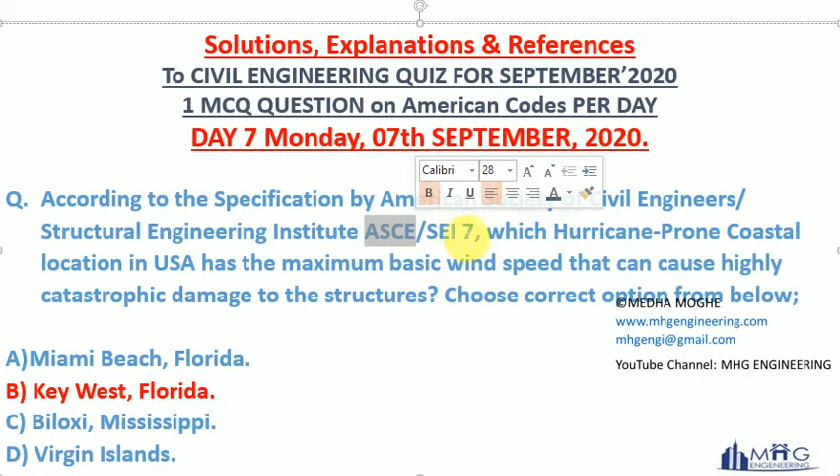And the 4 options were: A, Miami Beach, Florida; B, Key West, Florida; C, Biloxi, Mississippi; and D, Virgin Islands. And the correct answer is Key West, Florida. Key West, Florida gets the maximum basic wind speed as per American code ASCE. ASCE 7 is the American loading code.

Explanation: day 7 correct answer is B, Key West. Refer to the specification for minimum design loads and associated criteria for buildings and other structures, that is ASCE 7. 2016 is the latest version. I have attached the cover page of that. This is the cover page for ASCE 7-16, and I have also attached table C

26.5-3 for basic wind speeds at selected coastal locations in hurricane prone areas. It is on page 736 of this ASCE code, and these basic wind speed values are given in miles per hour. If you look closely at it, Key West, Florida gets the maximum basic wind speed. It is almost as high as 200 miles per hour. So this is the solution or proof for that answer.

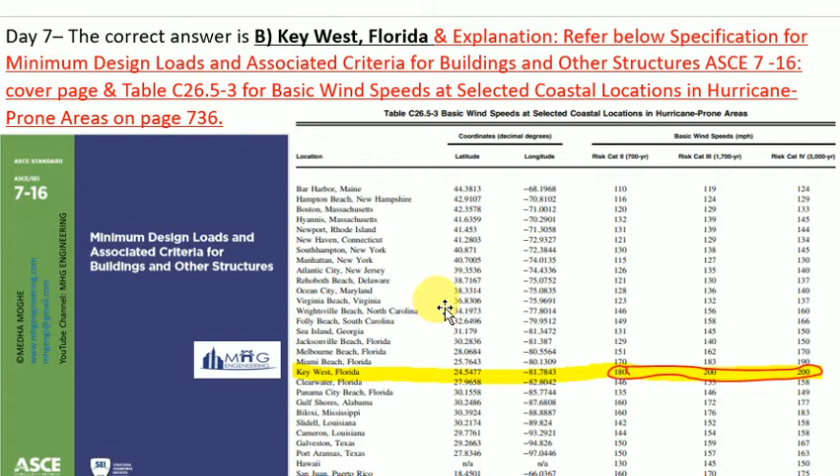Going to the next question, that is day 8, Tuesday 8 September 2020. The question was: according to Wind Loads and Anchor Bolt Design for Petrochemical Facilities, a special publication prepared by the Task Committee of the Energy Division of the American Society of Civil Engineers, ASCE, which of the following options is false for pipe racks? Pipe racks are the open structures which carry pipes in the process industry.

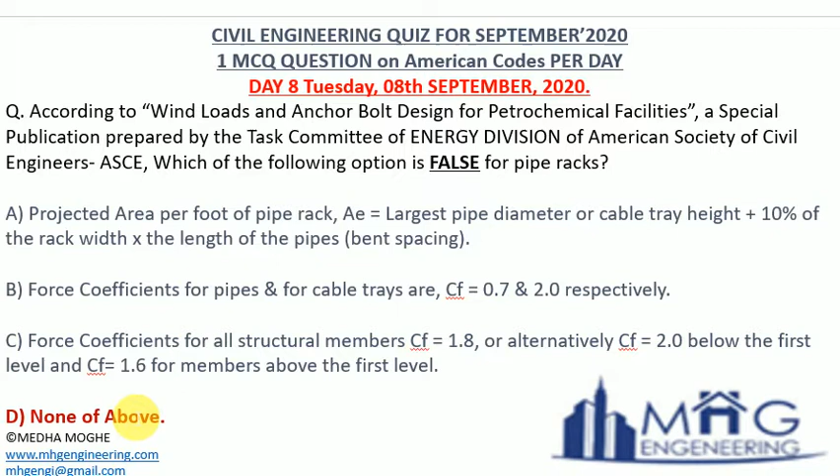And truly speaking, if you open this ASCE publication, Wind Loads and Anchor Bolt Design for Petrochemical Facilities, all these A, B, C are valid or true for pipe racks. They are not false. So D, none of the above, is the right answer. A, B, C are valid for any pipe rack wind load.

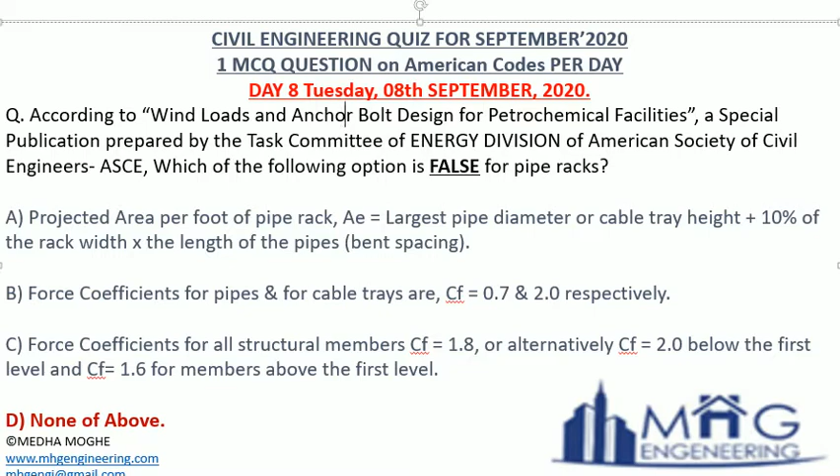Many engineers across the globe asked me to give the solutions for these quizzes, so instead of writing solutions to each one of them, I thought of making a solution video so everyone can see it. So day 8, the correct answer is D, none of the above, as options A, B, C are all valid for the pipe rack. And for the explanation, refer to the cover page below.

This is the cover page of the ASCE publication, Wind Loads and Anchor Bolt Design for Petrochemical Facilities. ASCE is the American Society of Civil Engineers. ASCE code is the loading code. They have this special publication. And apart from the cover page, I have also attached pages 4-2 and 4-3 for specifications for the wind loads published by the task committee of ASCE.

On page 4-2, it talks about the pipe rack, clause 4.1, and it says that for a pipe rack, CF, the force coefficient, is equal to 2.0 below the first level, 1.6 above the first level, and for all structural members it is generally 1.8. So option C of the above question is given in clause 4.1. Just next to it there is clause 4.1.1. It talks about the tributary area of piping, which covers option A of this question.

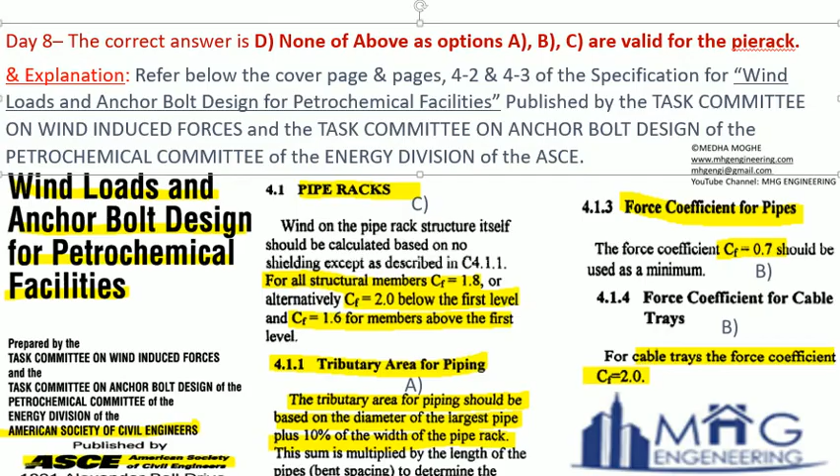Next, the day 9 question was on Wednesday 9 September. The question was, as per the latest American Concrete Code, that is ACI 318-2019, the slenderness effect can be neglected for columns not braced against sidesway if the following slenderness ratio of the member, K Lu upon r, is satisfied; choose the correct alternative. Four alternatives were given. If the columns are not braced against sidesway, the slenderness effect can be neglected if the slenderness ratio is less than or equal to 22. Option A is correct, and the reference for that is given on the next page.

For day 9, the correct option is A, less than or equal to 22. For explanation and reference, I have given the cover page of ACI 318-19. ACI 318-19 is the Concrete Code of America. ACI is the American Concrete Institute. 2019 is the latest version, and you will find information about slenderness on page 68 of the code, clause 6.2.5.1(a), which says that for columns not braced against sidesway, the slenderness ratio K Lu upon r should be less than or equal to 22. So option A is the correct answer.

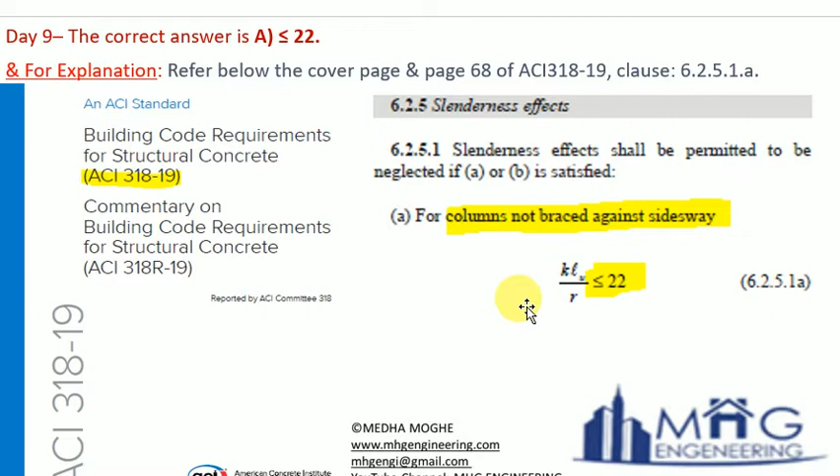Many got this correct. Those who are working on the American code will know the slenderness ratio. The basic aim of this quiz series: in October I had a quiz series on Eurocode, and in September on the American code. Basically, to increase awareness amongst civil engineers and students about world codes, I have floated this quiz.

The question on Thursday 10th September referred to the STAAD design parameters in the American Steel Code: Bmax, the maximum allowable width of flange, default value used in the design of tapered sections. So basically, what should be the maximum flange width for a tapered section in the American Steel Code as given in the STAAD parameters. STAAD.Pro V8i is the software used for design of structures, mostly in industrial plants. It is used worldwide, and for Bmax, the maximum width of flange default value, I had given four options, and option B, 83.333 feet, is the correct answer, with reference and explanation on the next page. This is day 10.

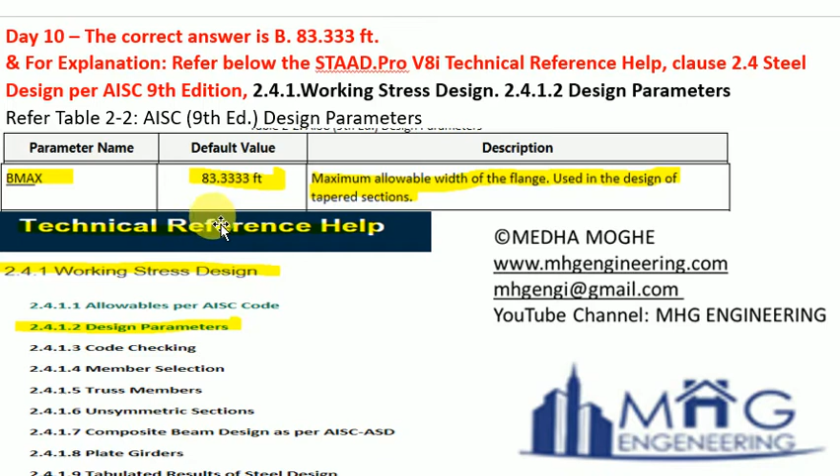Okay, so this is the reference or explanation for the correct answer. Many had asked me to attach this so they can have a look at it. If they have STAAD.Pro, they can just click, go in the technical reference and find this answer.

Going to the next day, that is Friday 11 September question, and the question was with reference to the STAAD design parameter in American Steel Code, DIA, the default value of diameter of shear connectors is as follows. Choose the correct alternative, and the four alternatives were given, and the correct alternative is D, 0.625 inches.

Now American Steel Code is AISC, American Institute of Steel Construction, AISC 360 they call it, and in American codes the foot pound system is also used, not always MKS or SI system. So there will be pounds, feet and inches in their codes. So D, 0.625 inch is the correct answer for default value of diameter of shear connectors.

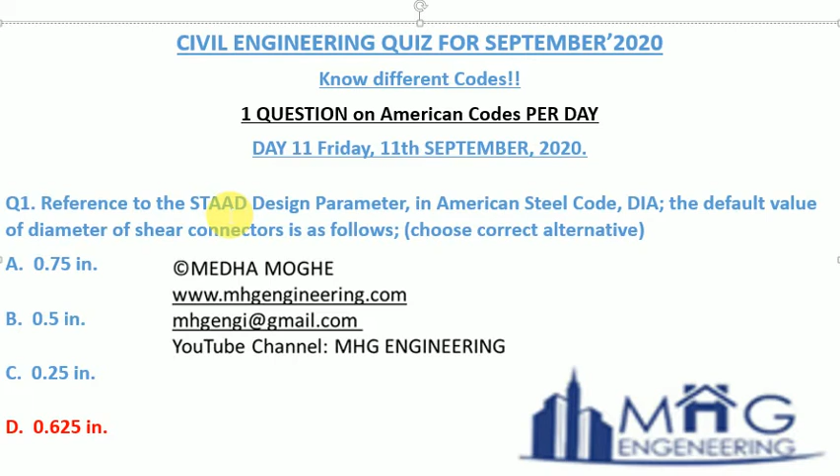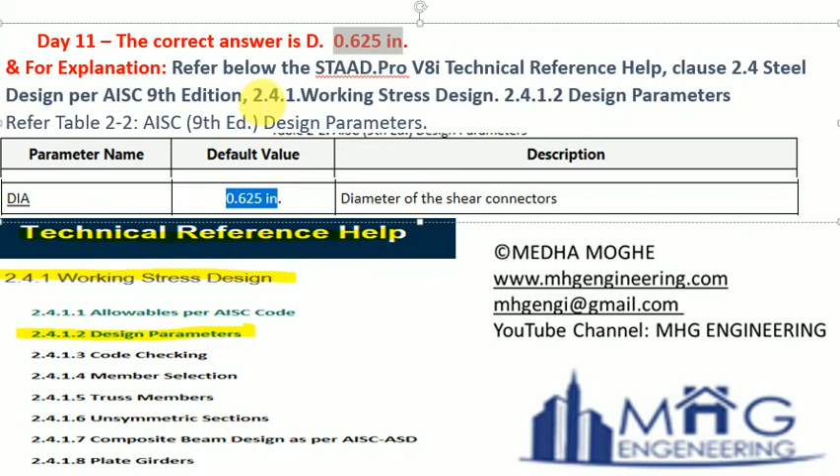Often shear connectors are used, especially if at the top flange of a steel beam there is an RCC slab, then there will be shear connectors from the steel beam to the RCC slab, and the default value is 0.625 inches. For reference and explanation for this option D, I have attached the STAAD.Pro V8i technical reference clause 2.4 steel as per AISC 9th edition, clause 2.4.1 working stress design parameters.

I have attached the snapshot of that table. It says that if the parameter is DIA, that means it is diameter of shear connectors and the default value is 0.625 inches. I have also attached the snapshot of the technical reference help page showing the clause where you will find it. So do click, go on the technical reference page and you will get the answer.

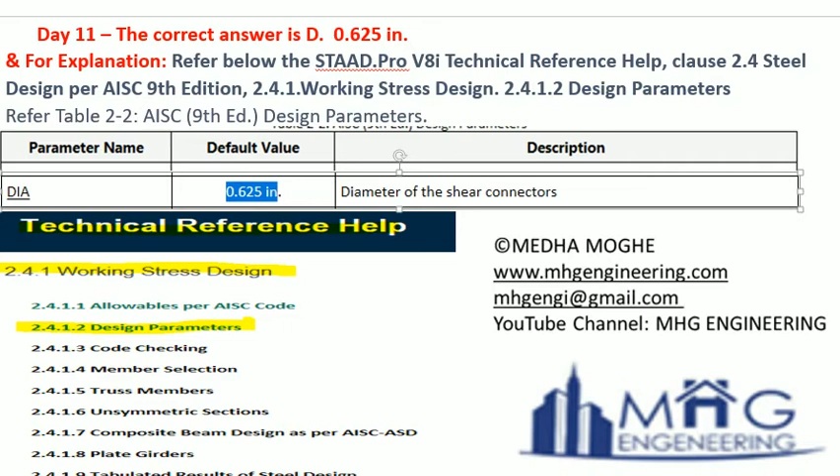So moving to the next question, day 12, Saturday 12 September 2020, and the question was, as per AISC LRFD specification, the axial tension capacity of a member is based on which of the following limit states? Choose the correct alternative. Basically AISC, as I said, is the steel code of USA, American Institute of Steel Construction. LRFD is similar to what in India we call limit state method, load and resistance factor design.

The options given for axial tension capacity of member were: A, tensile yielding in gross section, B, tensile rupture in net section, C, both A and B, and D, none of the above. And the correct option is C, both A and B. For the axial tension capacity formula as per AISC LRFD, we require to find both tensile yielding in gross section and tensile rupture in net section.

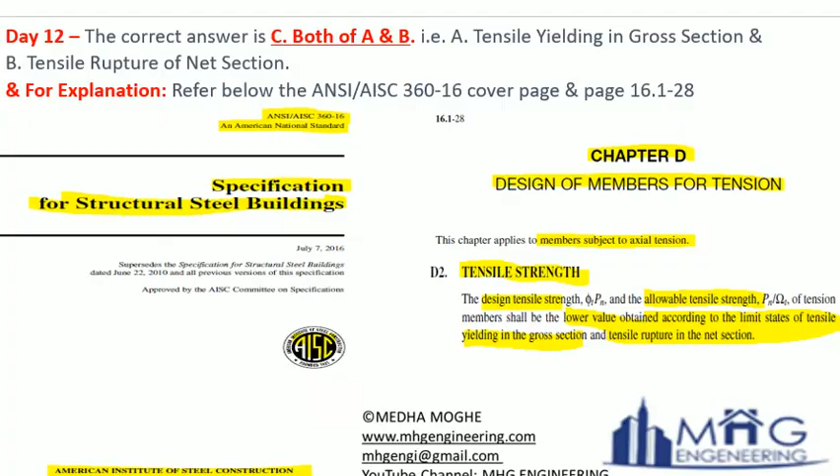It is very similar to our IS 800 2007 Indian Steel Code. In that also these two strengths we require to find for tensile capacity. So many country codes are similar. They run on the same lines, though coefficients vary a bit. So for explanation, I have attached references for both A and B, where A is tensile yielding in gross section and B is tensile rupture in net section.

I have attached the AISC 360 2016 steel code. 2016 is the latest version. That cover page I have attached over here. You will see over here ANSI AISC 360-16. ANSI is American National Standards Institute. Basically they formulate the various American standards. AISC, as I said, is a specification for structural steel buildings, and I have attached a snapshot of chapter D.

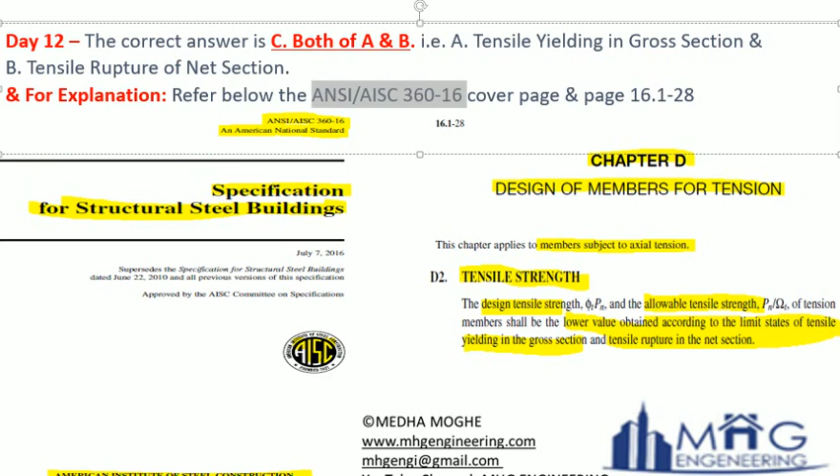Chapter D in this steel code is for design of members for tension, especially members subjected to axial tension. In clause D.2 they have said that the design tensile strength and the allowable tensile strength of tension members shall be the lower value obtained according to the limit state of tensile yielding in gross section and tensile rupture in net section.

So these are basically 6 days answer keys I have attached, from day 7 to day 12, covered in this second solution video of civil engineering quiz for September 2020. So hope all your queries are solved, and you have seen all the answers, explanations and references. Hope this solution video will be helpful to you.